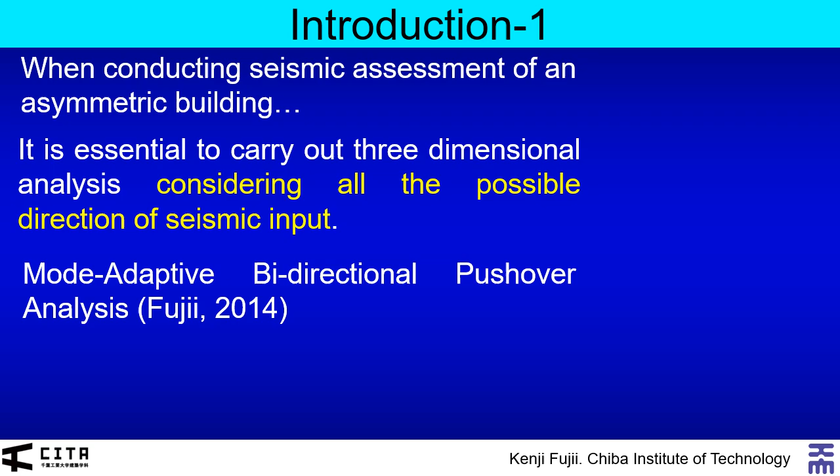When we conduct seismic assessment of an asymmetric building, it is essential to carry out three-dimensional analysis considering all the possible directions of seismic input. For this purpose, we have proposed a simplified procedure, that is, mode-adaptive bidirectional pushover analysis. In this procedure, the upper bound of peak response of an asymmetric building under bidirectional seismic input is predicted by considering the two independent equivalent single degree of freedom model. This procedure has been extended for an irregular base isolated building.

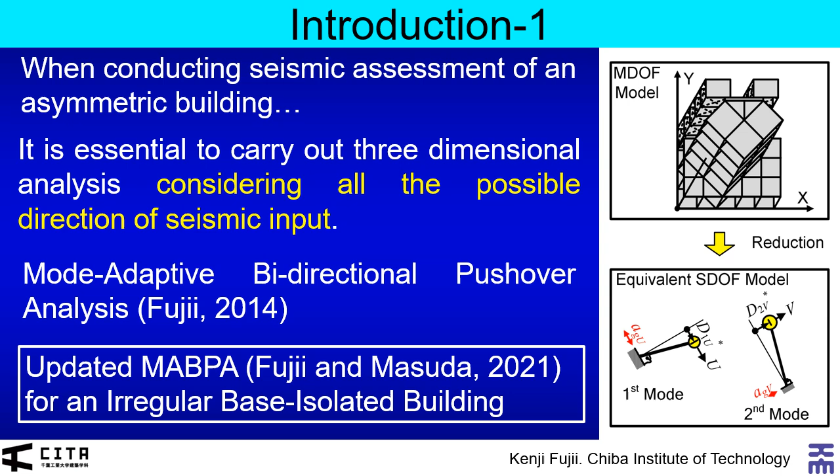It is well recognized that the near-fault pulse-like ground motions have large directivity effect. Therefore, the response of building may be influenced significantly by the angle of seismic incidence. In addition, the pulse period Tp would be longer when the moment magnitude becomes larger. Therefore, the following questions arise.

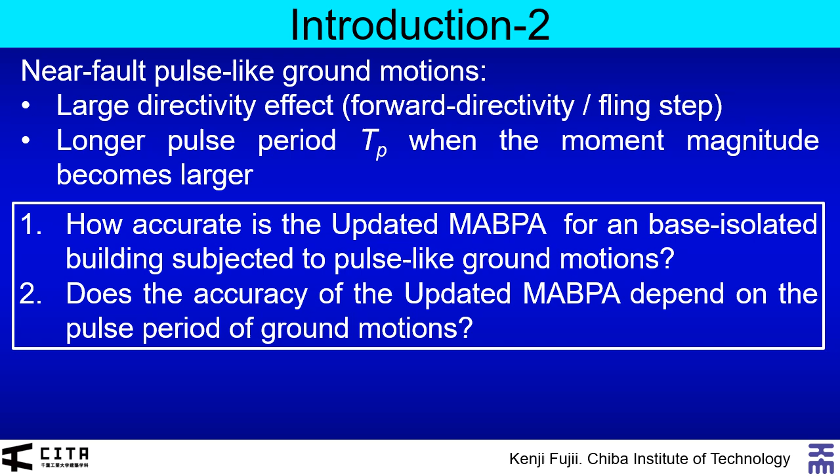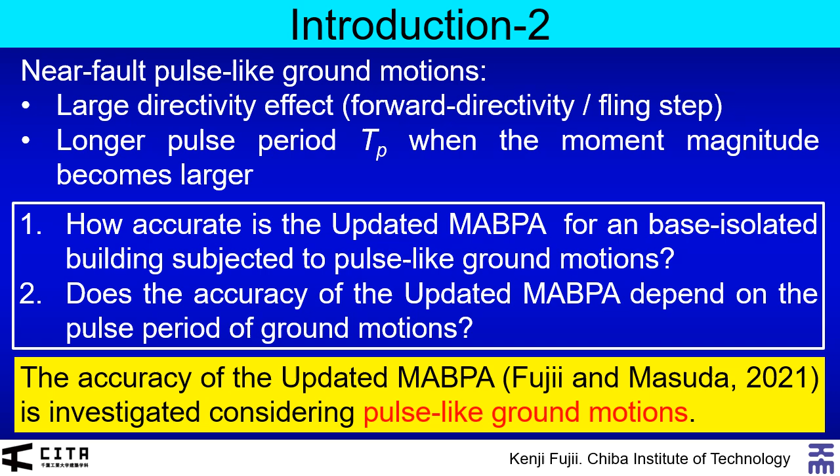How accurate is the updated mode adaptive bidirectional pushover analysis for a base isolated building subjected to pulse-like ground motions? The second question is, does the accuracy of the updated mode adaptive bidirectional pushover analysis depend on the pulse period of ground motions? So, in this presentation, the accuracy of the updated mode adaptive bidirectional pushover analysis is investigated considering pulse-like ground motions.

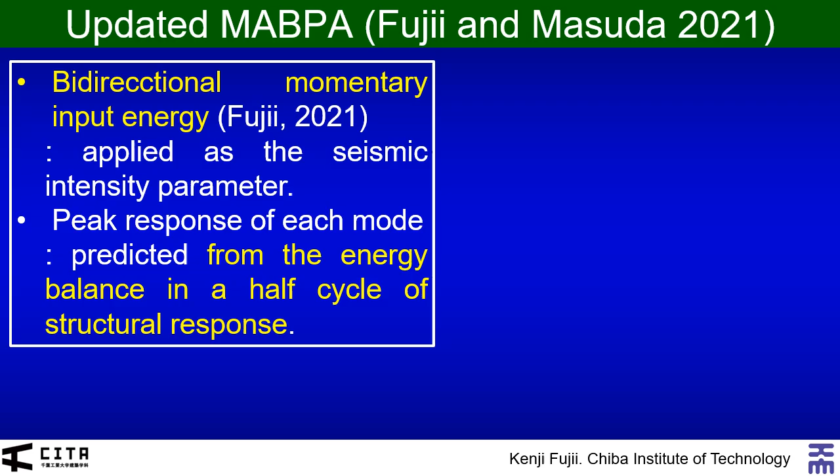I would like to explain about the updated mode adaptive bidirectional pushover analysis. There are two updated points in this procedure. That is, bidirectional momentary input energy is implemented into this procedure as a seismic intensity parameter. The second is the peak response of each mode is predicted from the energy balance in a half cycle of structural response. This figure explains how to predict the peak response of each mode.

The increment of hysteresis dissipated energy in a half cycle is calculated considering the hysteresis loop. The maximum momentary input energy in a half cycle is calculated from the bidirectional V delta E spectrum. Considering the energy balance in a half cycle, we can obtain the peak equivalent displacement of each mode. The other part is the same as the original procedure.

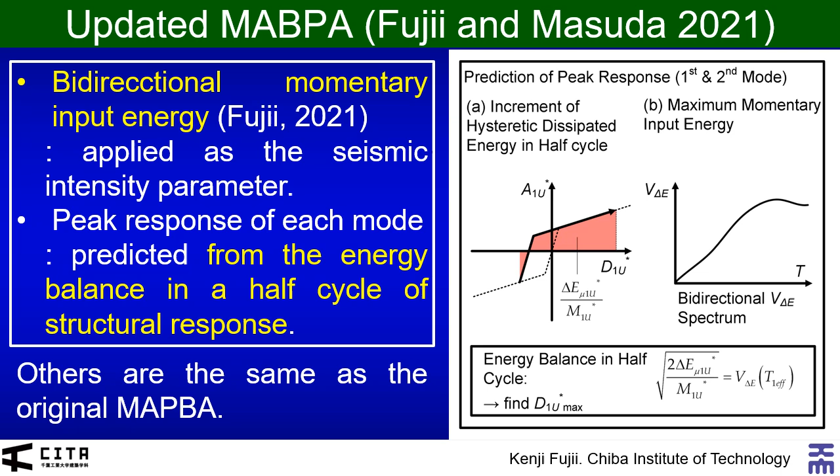I would like to explain the building model. Here shows the structural plan and overview of the base isolated building model. This is a 5-story base isolated building model. As you see, the superstructure is quite irregular in plan and also elevation. Isolation layer is installed below level Z0.

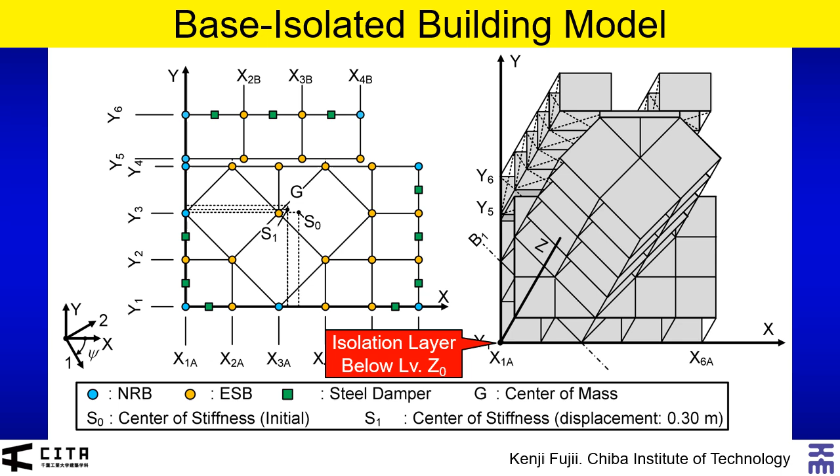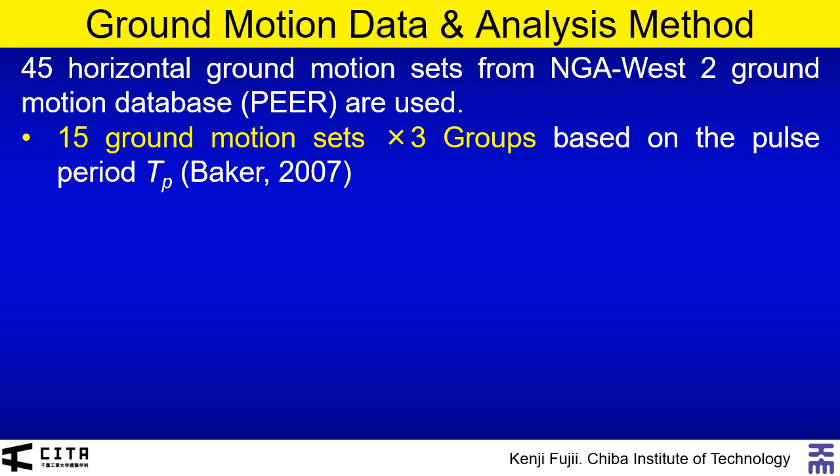Next, I would like to explain the ground motion data and analysis method. In this study, 45 ground motion sets from NGA West 2 ground motion database are used. These ground motion sets are divided into three groups based on the pulse period Tp proposed by Baker. The range of Tp for group 1 is from 1.0 seconds to 2.0 seconds, while for group 2, the range is from 2.0 seconds to 4.0 seconds, and in group 3, Tp is larger than 4 seconds. Those ground motion sets are scaled according to the bidirectional V delta E spectrum.

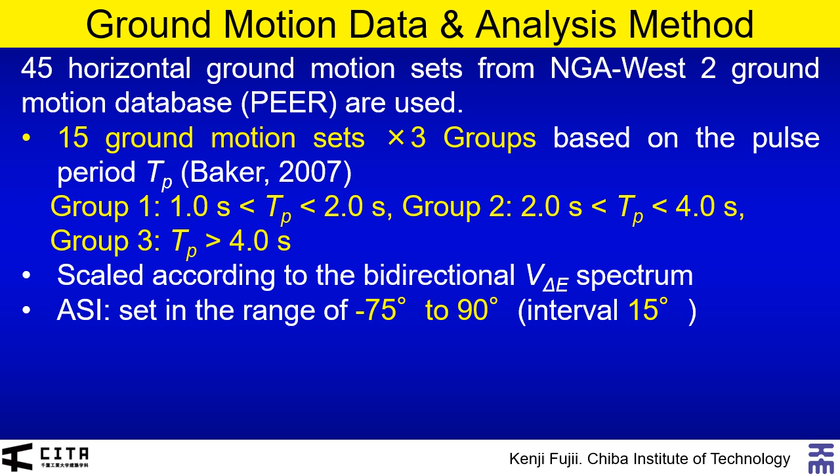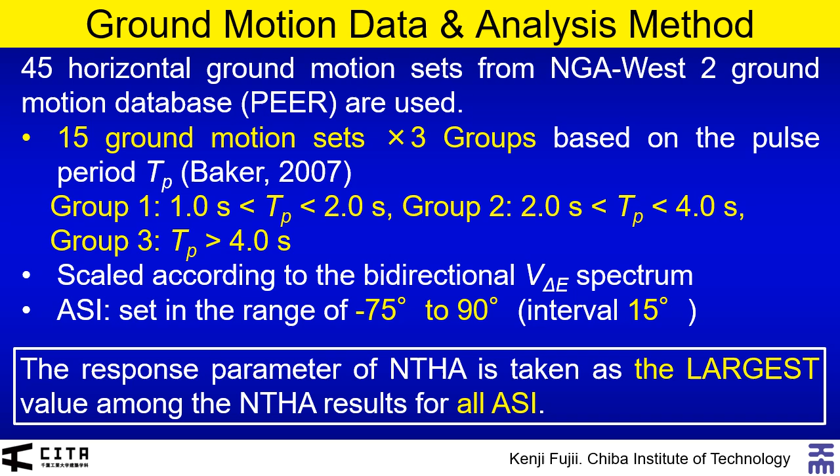The angle of seismic incidence ASI is set in the range of minus 75 degrees to plus 90 degrees with an interval of 15 degrees. In this presentation, the response parameter of nonlinear time history analysis is taken as the largest value among the nonlinear time history analysis results for all ASI.

I would like to discuss the accuracy of this procedure. Here shows the accuracy of the predicted equivalent displacement of the first and second modal responses. The horizontal axis indicates the accuracy ratio of the response parameters predicted by the updated procedure and the nonlinear time history analysis results, while the vertical axis indicates the cumulative relative frequency. As shown here, the results of group 1 are on the larger side, while the results of group 3 are on the smaller side. The accuracy of the predicted peak equivalent displacement is satisfactory for both modes.

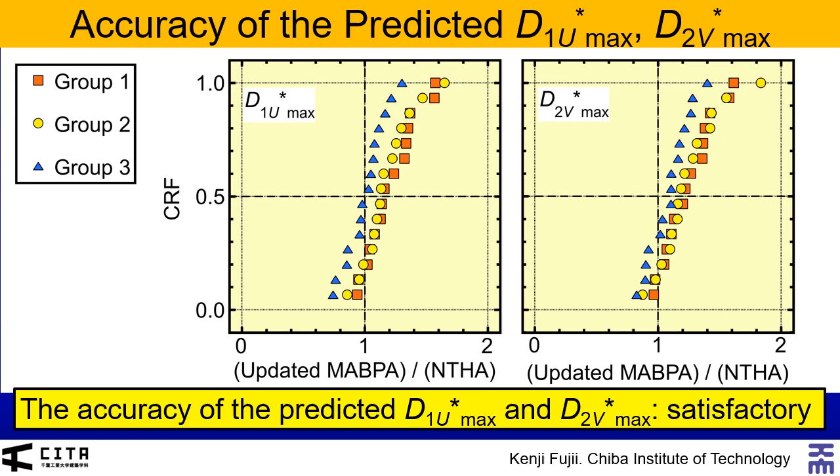This figure shows the accuracy of the predicted peak displacement at level Z0. In this figure, the median value of the accuracy ratio is considered. As shown here, the results of group 1 are on the larger side, while the results of group 3 are on the smaller side. The difference of the accuracy ratio at frame Y1 and Y6 is not significant. It can be concluded that the predicted peak displacement at level Z0 is conservative.

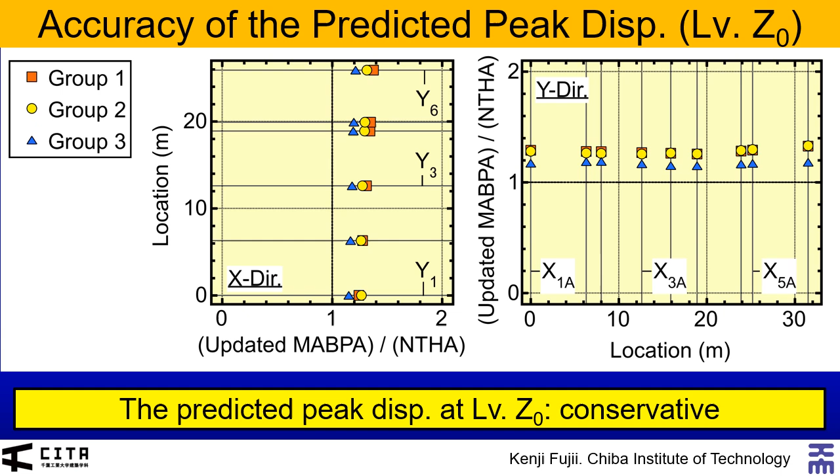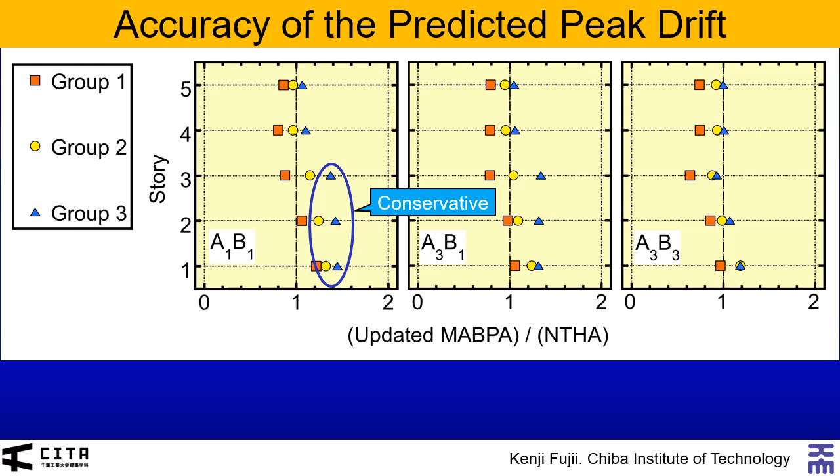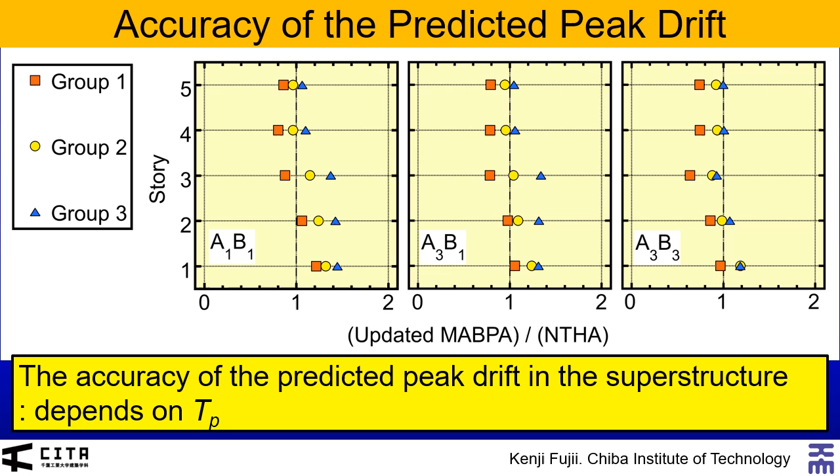Next, this figure shows the accuracy of the predicted peak drift in the superstructure. As shown here, the results of group 1 are on the smaller side, while the results of group 3 are on the larger side. The predicted peak drift at the upper stories in column A3-B3 is unconservative, while the predicted peak drift at the lower stories in column A1-B1 is conservative. Therefore, the accuracy of the predicted peak drift in the superstructure depends on the pulse period.